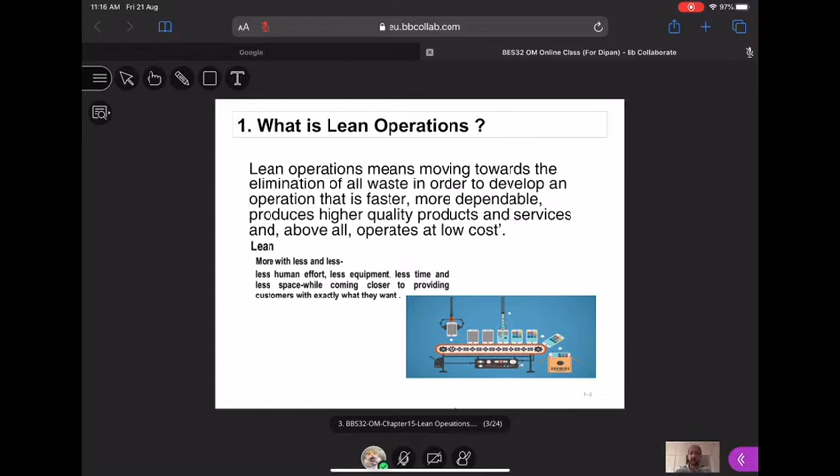So one more time, lean operation is part of pull method. It is definitely not a push method. So that is something important to note in lean as well.

There are 4 elements of lean. The first element is waste elimination. Waste elimination means we try not to have any kind of wastage, that we don't waste time, we don't waste effort, we don't waste money, we don't do rework as well. Which means whatever we do, we do it right the first time.

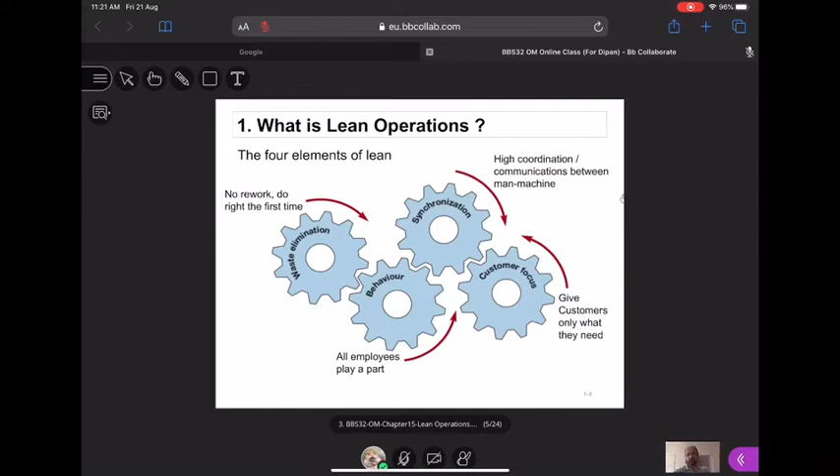Muda basically are activities in a process that are wasteful because they do not add value to the operation or the customer. This is basically when company use more input than what is required, and actually the customer do not require it. In the end, you're of course going to waste a lot, more time, more effort, more money, but actually your customer don't require it. So that's called muda.

Mura, on the other hand, means lack of consistency or unevenness that result in periodic overloading of staff or equipment. Mura basically means there's inconsistency. Sometimes you use more, sometimes you use less. So we need to eliminate mura as well.

The third one is called muri. Muri means absurd or unreasonable. It is based on the idea that unnecessary, unreasonable requirements are put into process that will result in poor outcome. In simple terms, muri basically means absurd, unreasonable, overburden, overuse of resources causing harm or failure. This is using something too much, overburden, overuse, and it's no good as well.

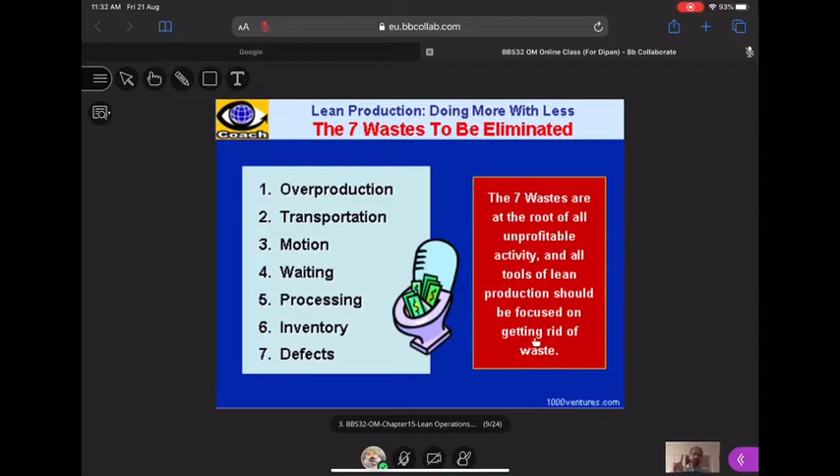So every company, even a hotel when they operate, or Apple when they make iPhones or whatever products, must eliminate these 7 wastes in order to be very lean. Of course, what I'm going to do now is explain these 7 wastes one by one. Guys, please pay attention. The first waste that every company must eliminate is what we call overproduction.

Overproduction, needless to say, basically means producing more than what is required. Overproduction, let me tell you, is the worst kind of waste because it causes other waste and obscures the need for improvement. One more time, overproduction means producing more than what is required. Let me just give you one example of overproduction.

Just say, for example, I'm a mobile phone company. Every week I sell 100 mobile phones. But you know what I do? I make 150 per week. So I actually only sell 100. But I manufacture 150. Then for this week I sell 100. What happened to the other 50? I put them in my warehouse. Then next week again I only sell 100 but I manufacture 150. What happened to the other 50? I put them in my warehouse.

Guys, these which I put in my warehouse, I may not use them. And one day they become obsolete. In the end, you find that I waste many other things. That's why it's written here, overproduction is the worst kind of waste. You know why? When I overproduce, I have used more raw material. I have used more people to make this extra that I never sell. I use more machines, I use time and so on in order to overproduce, and in the end it did not give me any kind of benefit. So it's the worst kind of waste.

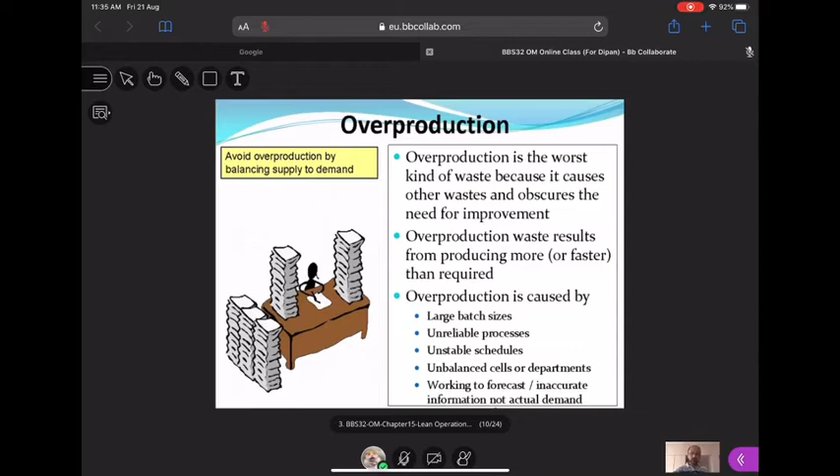So guys, you find that here there's transportation waste because I need a forklift driver and a forklift to transport, then to transport again, but in the end, it makes the same product. There's no value add.

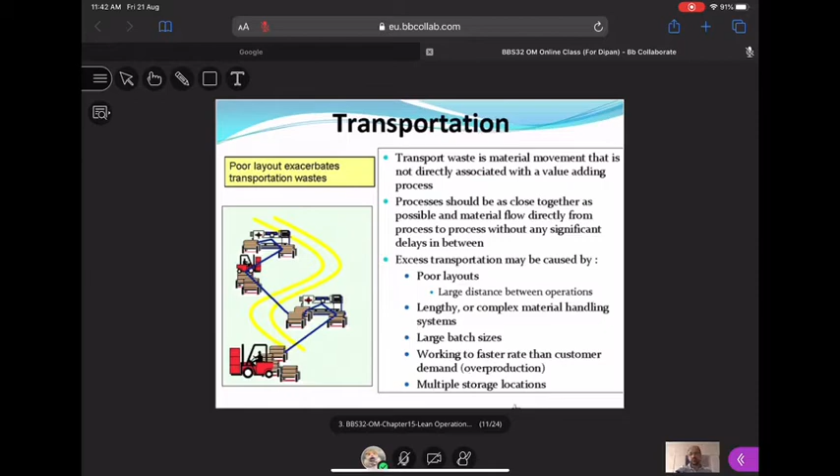Okay, so I covered overproduction and transport. The third waste that companies must eliminate is what we call motion.

Motion is the movement of humans. So just now transportation waste is the movement of materials, but motion is the waste of human movement.

Every company must make sure they try to eliminate motion as much as possible. One example I can give you of a company that eliminates motion tremendously is McDonald's.

McDonald's designed their restaurant in such a way that each person only walks 1, 2, 3, 4 steps to do some work.

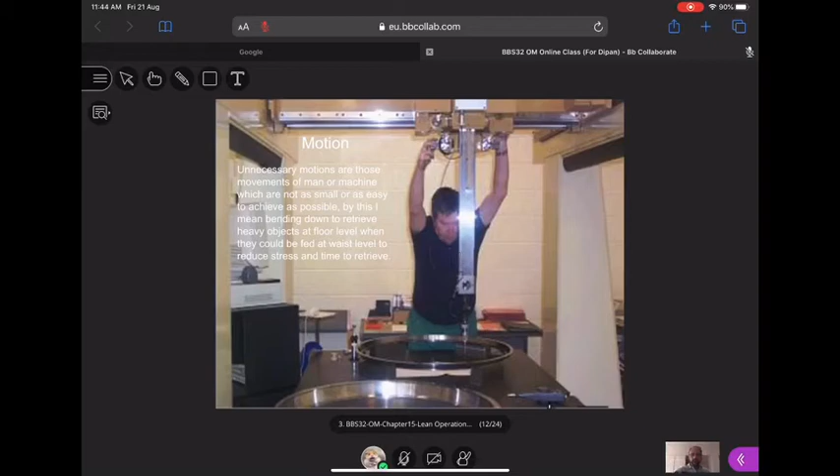So I covered overproduction, transport, and motion. The fourth waste that a company must eliminate is what we call waiting time. Waiting time basically occurs between a process when it is not synchronized.

You find that one machine or one person has to wait in order to do the job. So the waste of waiting time is idle time produced when two interdependent processes are not synchronized - either man and man, man and machine, or machine and machine.

Let me give you a simple example of waiting time. Say, for example, this particular machine needs 5 minutes to do a work. Before this machine, there's another machine that needs 10 minutes to do the work. Now let me tell you what happens.

We start the day. Machine number 1 takes 10 minutes to do the work, machine number 2 takes 5 minutes to do the work. So we start the day - machine number 1 starts, takes 10 minutes to do the work, and puts it for machine number 2.

Machine number 2 starts to do the work, takes 5 minutes, and machine number 1 continues to do something else, which also takes 10 minutes. Then machine number 2 finishes the work in 5 minutes and has to wait for machine number 1, which will finish in 10 minutes, so it waits for 5 more minutes.

5 more minutes later, machine number 1 finishes and gives it to machine number 2, then machine number 1 does another work, which takes 10 minutes. Machine number 2 finishes work in 5 minutes and has to wait 5 more minutes.

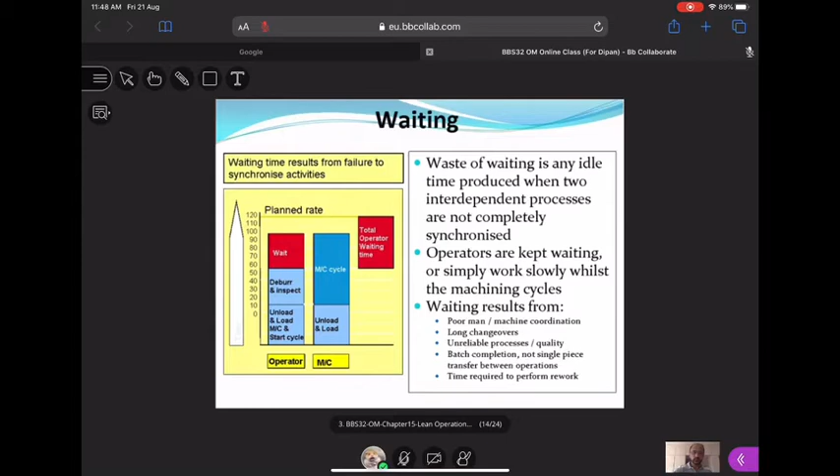Guys, please pay attention. Over processing basically means doing more than what is required. So over processing is putting more into a product than what is required by the customer.

Let me tell you, to paint the car, there are 3 coats of paint that need to be painted. The first coat is called the primer coat. It normally looks very brownish in color in order to prevent the car from rusting, the metal from rusting. Then the second coat is called the undercoat, which is to protect the primer coat. And the third coat is what we call the finishing coat, a shiny paint.

So this guy who is painting the car, let me tell you what he does. He paints the car with the primer coat, undercoat, and then the finishing coat. But you know what he does? Under the bonnet, I'm sure you know what the bonnet is. In a car, there's a bonnet where you open it and the engine is there. And under the bonnet, can you look at me?

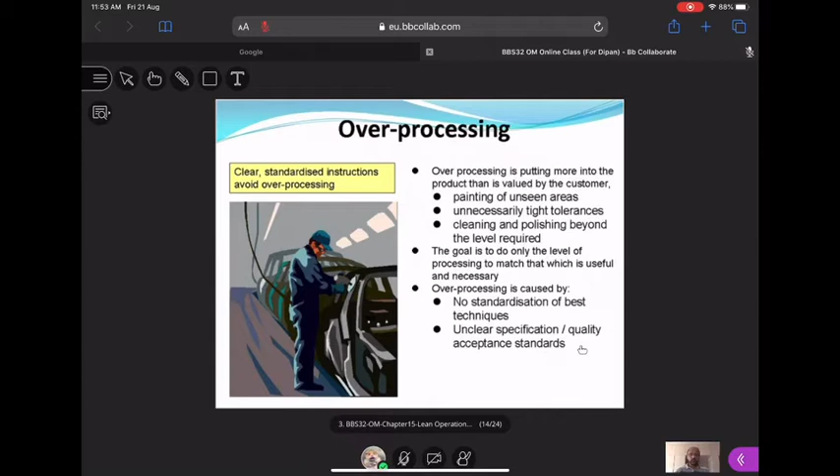The sixth waste is what we call inventory. Guys, inventory means stock. Some companies order too much stock than what is required, and sometimes they never use this stock. So let me give you a very simple example of inventory.

Say this mobile phone company sells 100 mobile phones every week, but the raw material stock they order is 150 for that week. They use raw materials to make the 100 mobile phones because they sell 100, but they order 150. So what happened to the extra 50? It ends up in the warehouse. That's called inventory waste, which means they ordered too much inventory than what is required.

And guys, I think I mentioned in our first lesson, say this inventory is a perishable item. Perishable means it has an expiry date. For example, Starbucks has cakes and so on. Maybe they order too much flour, too much sugar. These are perishable items with expiry dates. They put them in their storeroom, make cakes, but in the end they never use all this inventory. It all becomes spoiled because it's expired and they need to throw it away. All wasted.

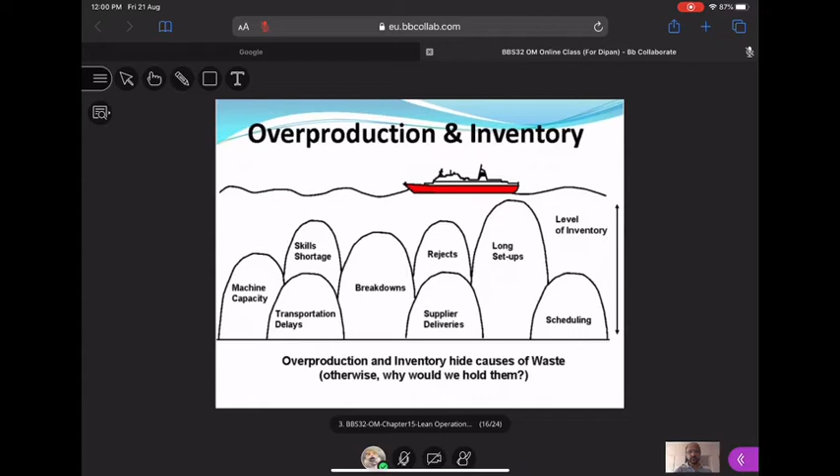Lastly, the 7th waste that companies must eliminate is called defects. Defects basically means when a company makes a certain product or offers a certain kind of service, they do it right the first time and don't make something defective or wrong. Let me give you a simple example using a mobile phone. If I'm a company making mobile phones and in the end I make one which is defective, you know what I need to do?

Firstly, I need to investigate. Maybe my final mobile phone cannot switch on; it's defective. Then I need to investigate why it cannot switch on. Once I know why, maybe I bring it to station number 6 and repair it, so that in the end there's 0 defect and it can switch on.

So guys, when a company makes defective products, they need to do rework. I take this mobile phone, put it to station number 6 as I mentioned, and repair it. When I repair, I waste time, effort, and money, and everyone else cannot do their work. So defects are also a very huge kind of waste that every company must eliminate.

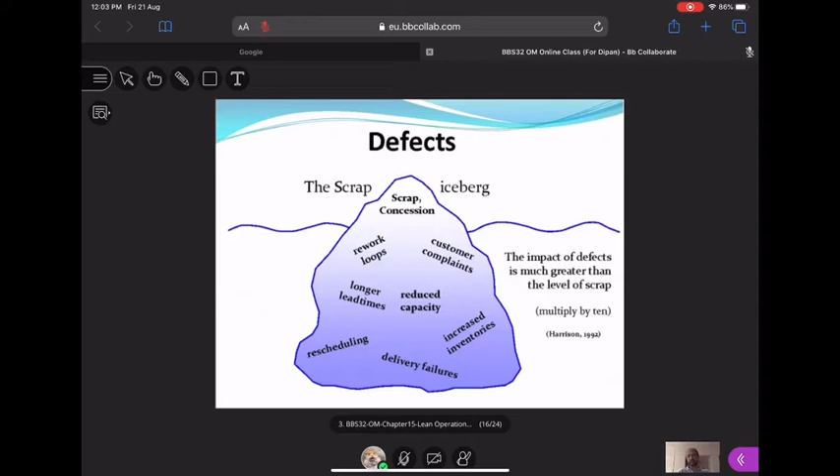So every company must make sure that they eliminate defects, because defects need rework. And when we do rework, we waste time, effort, and money for sure. Okay, so I just covered these 7 wastes that companies must eliminate. They are the ones who came up with all these things in order to make sure that we eliminate waste, are very lean in operation, and make high quality.

And it all starts with Toyota. Let me tell you, Toyota is a company in Japan. They started a lot of things in quality management, in lean management, etc. And they have come up with a fantastic system. That's the reason the whole world is following.

So one more time, another way a company can make their operation very lean is to implement the 5S. But don't worry, these 5S in Japanese, we have converted to English. So Seiri means sort, Seiton means straighten, Seiso means shine, Seiketsu means standardize, and Shitsuke means sustain. And you can see when we convert to English, it's also S. So coincidentally, all 5 are S in English as well.

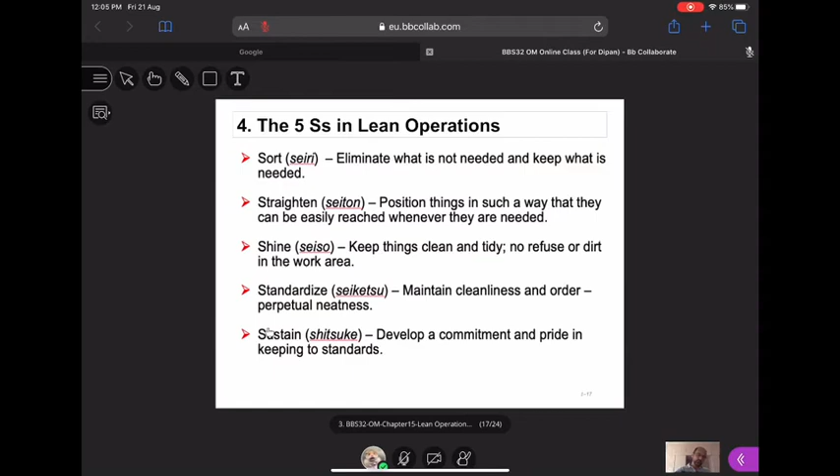So guys, what I'm going to do now is explain to you how a company can use this 5S as part of their operation, one more time, to be a lean operation. And again, what does lean mean? Less, less, less, to only produce what is required for the customer. So let me explain this 5S. The first S is what we call sort.

Sort is basically to eliminate all the unnecessary items. So eliminate what is not needed, and only keep what is needed. Unnecessary refers to those things which are not needed for your current work; you eliminate them. And you only keep what is needed for your current work, only things which are required in doing your job. What is not required, you don't keep.

So guys, let me give you a simple example of sort. Say for example, I'm a factory worker and there are 10 tools in front of me, maybe a hammer, a screwdriver, a saw, whatever it is. But to do my current job, I only need 5 tools. So in sort, the other 5 tools which I don't require, I take and put in the cabinet. Then only the 5 which I require, I put in front of me. So guys, that's called sort.

Because if I have the 10 tools there, when I do my work, I may actually take the wrong tool and do the work wrongly. I waste time, effort and money again. So one more time, sort basically means anything which is unnecessary, you eliminate. You put it in a cabinet; in future, if you need it, you can take it back again. Only what is necessary, you put in front of you. So that's called sort.

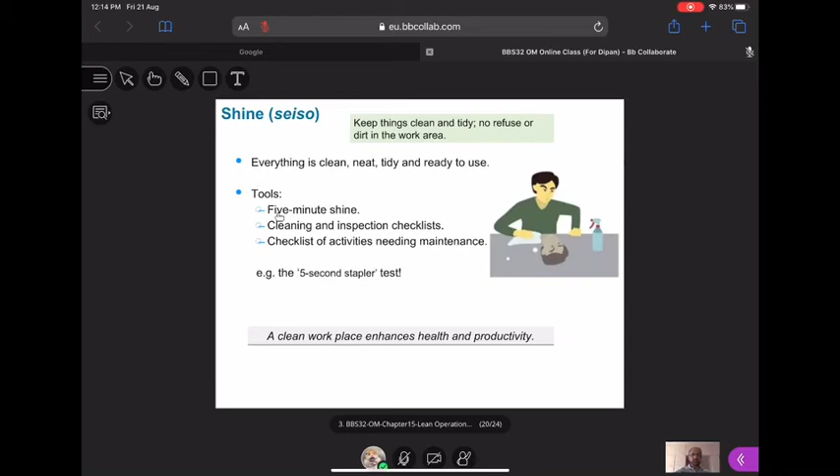Okay, so maybe you don't need to do it the whole day, but you can do a 5-minute shine before you sleep. Spend 5 minutes to clean up. It's always a good habit. Okay, so I covered sort, straighten, and shine. The fourth S is what we call standardize. Guys, standardize is to maintain cleanliness in order to have perpetual neatness. This is not just clean and neat, but to have perpetual neatness, and that is called standardize.

Standardize is very important because anybody who does the work in a company will know how the job needs to be done, because we come up with a standardized way to do work. One example of standardize is SOP. SOP stands for Standard Operating Procedure. So if I'm a factory worker doing a certain kind of work, the factory should come up with a standard operating procedure. Step number 1, do this. Step number 2, do this. Step number 3, 4, 5, do this. And put it in front of me. And I follow these steps to do my work.

So everyone does this standardized way of doing the work. Nobody does it differently. And you find that in the end, we can save a lot of time, effort, and money, because we are not going to do it a different way and need to do rework, etc. So that's called standardize. And I'm sure you do standardize at home as well.

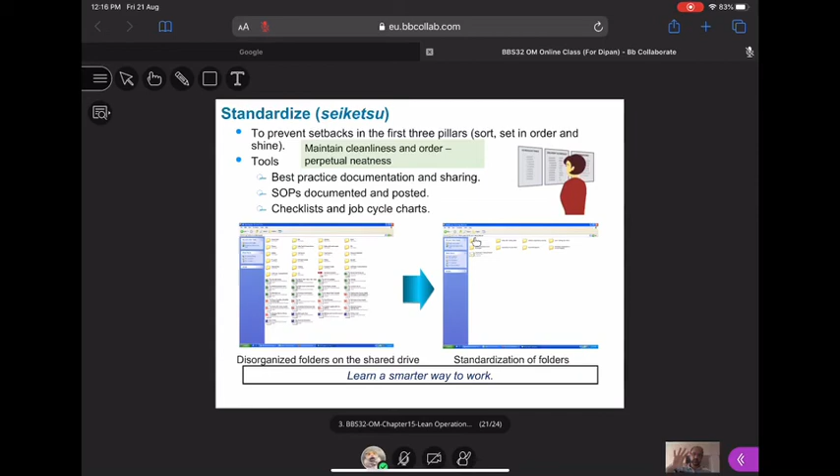Guys, sustain basically means to make this entire 5S, the first 4S and this last S, a habit of what we do every day. No use if today I sort, I straighten, I shine, and I standardize, and next week I don't do it anymore. So sustain means we must make sure we make these 4S plus sustain a habit that we do every day, every week, every month, every year. We must make sure it becomes a habit.

So that's called sustain. Let me tell you how many companies sustain. They have a visual management board showing a 5S audit. For example, we are a department and we have an audit board. When we start the day, after everybody sorts, they put a tick. After everybody straightens, they put a tick. After everybody shines, they put a tick. After everybody standardizes, they put a tick. So this visual management board forces us, because we need to put ticks there, so we will be sustaining all the time.

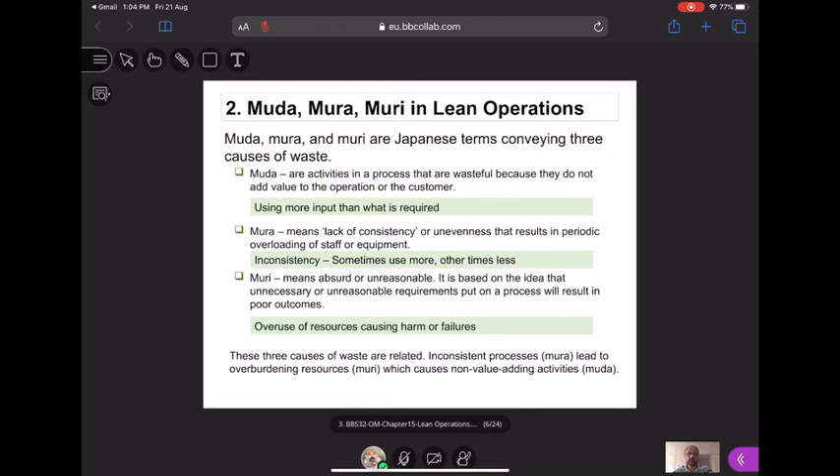Okay, this is no need to be very detailed. Please refer to this slide and explain what Muda means, what Mura means, what Muri means. So you can try to look at this. Don't copy and paste, try to answer in your own words a little bit. So try to read and then answer in your own words. Okay, that's question number 1.

Question number 2, based on McDonald's operation, you need to explain the 7 types of waste that McDonald's needs to eliminate in their lean operation.

So let me use one example. You can say McDonald's, so the first kind of waste is called overproduction. So you explain what overproduction is. You say overproduction means company producing more than what is required. Then after, I want you to tell me how McDonald's in their operation, think of McDonald's when they run their restaurant, not their HQ, not their office and so on, but a McDonald's outlet, you tell me how McDonald's can try to avoid or eliminate overproduction.

So if I were to give an example, you say what McDonald's can do is they should not anyhow produce as many burgers and French fries as possible. Then that's called overproduction. Then if they are unable to sell within the next 10 minutes, they need to throw away because it becomes soggy already. If I'm not wrong, in McDonald's, 7 minutes, they cannot sell the fries anymore, and I think about 14 minutes, somewhere they cannot sell the burger anymore. So that's how you explain that McDonald's should not make overproduction of their burger or their fries because if not, it becomes soggy, then it will be wasted.

Then the second kind of waste, you say transportation. Then you tell me what transportation waste is and how McDonald's can eliminate it. Give me an example of transportation waste. So you explain all the 7 wastes.